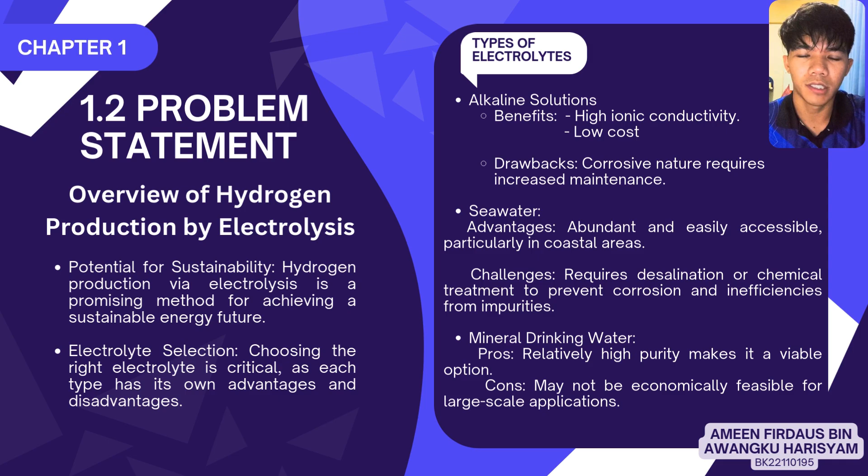The next subtopic is 1.3, the research objectives. So the primary objective of this research paper is to identify the most suitable and environmentally friendly electrolyte for hydrogen production via electrolysis. To achieve this goal, the study will focus on three specific objectives. The first one is evaluation of electrolytes. The first objective is to systematically study and test seawater, alkaline water, and mineral drinking water

as potential electrolytes. By measuring key parameters such as hydrogen yield, energy efficiency, and system stability under controlled experimental conditions, we will gather comparative data to assess the practical applicability of each electrolyte. This includes examining factors like ionic conductivity, reaction kinetics, and their compatibility with standard electrolysis systems. The second objective is environmental and economic impact assessment.

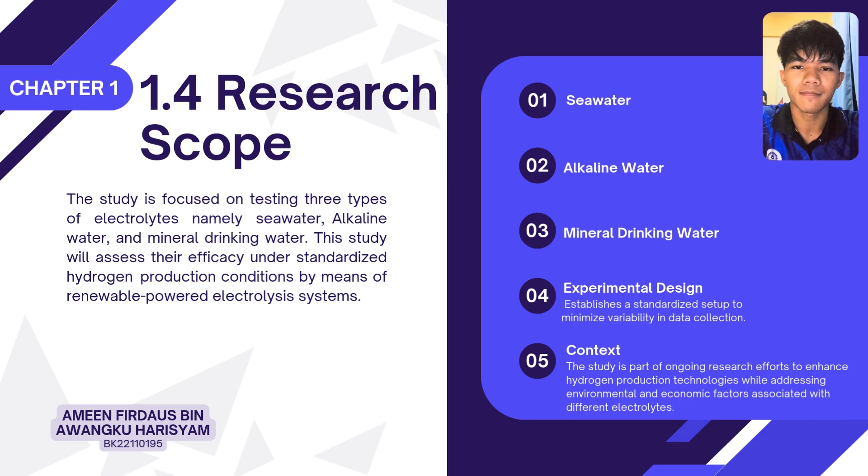Coming on to the last subtopic of chapter 1, research significance. The significance of this research lies in its potential to greatly influence the sustainable energy landscape by advancing the production of green hydrogen. By identifying the most effective and feasible electrolyte, this study could significantly reduce the operational costs associated with electrolysis systems. This is particularly crucial as the hydrogen economy expands, with various sectors and governments increasingly seeking to transition to more sustainable energy sources.

Moreover, the findings from this research may inform the design and development of next generation electrolyzers, enabling the structures to be tailored for optimal compatibility with specific electrolytes. If seawater emerged as a viable option, it could facilitate hydrogen production in areas with limited clean water resources, allowing these regions to invest in renewable energy solutions. Additionally, a clear understanding of the strengths and limitations of alkaline and mineral water electrolytes could enhance their targeted applications in both industrial and decentralized settings.

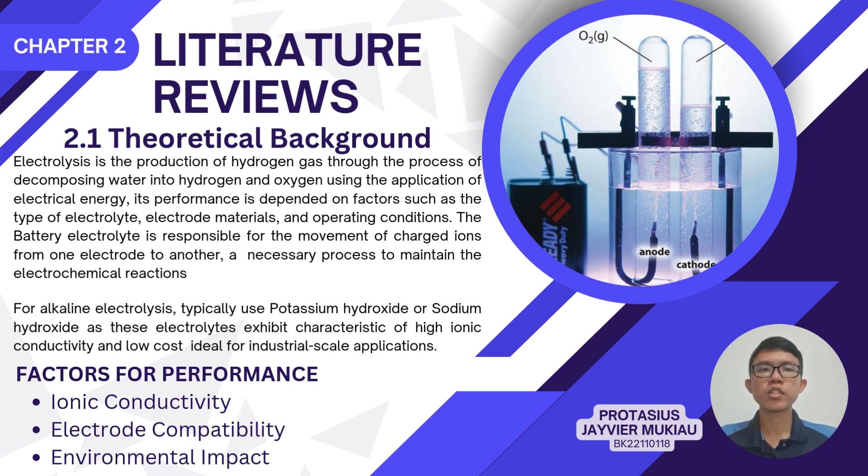Now for the factors that affect the performance of the electrolytes. Number one, ionic conductivity. Higher ionic conductivity minimizes energy loss, leading to improved efficiency of the system. Number two, electrode compatibility. Certain electrolytes are corrosive to electrodes, which requires more durable materials to be used. Three, environmental impact. Byproducts and resource consumption are different depending on the type of electrolyte.

Now I'll be presenting previous studies. These previous studies were mainly focusing on testing three types of electrolytes, namely seawater, alkaline, and mineral water. These studies assess their efficacy under standardized hydrogen production conditions by means of a renewable-powered electrolysis system.

Alkaline electrolytes, especially potassium hydroxide and sodium hydroxide, have been investigated more extensively owing to their higher ionic conductivity and low cost. These electrolytes are commonly used in industrial-scale electrolysis settings, with literature noting their reliability and performance under standard conditions. However, researchers also listed challenges like electrode corrosion, material degradation, and environmental impact affecting reliability. Although alkaline electrolysis is a well-established technology, considerable improvements in waste management are needed to improve its sustainability.

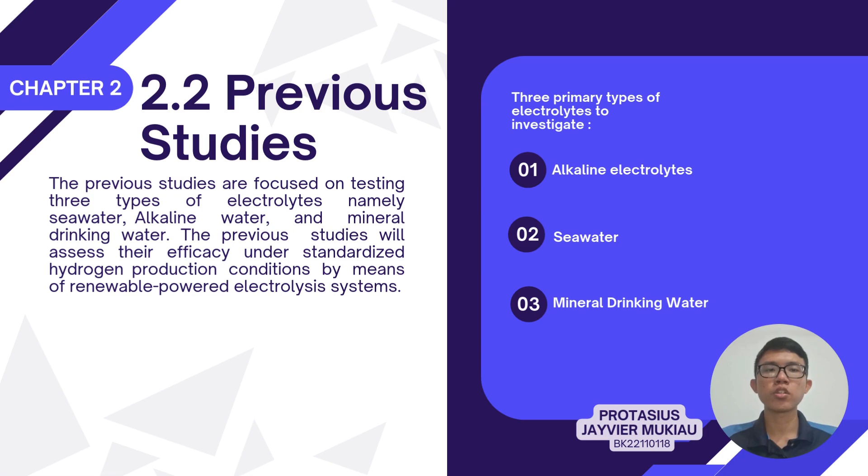Lastly, mineral drinking water, because of its higher purity, has been considered for hydrogen generation as an electrolyte. Its low level of impurities makes it less corrosive, requiring less maintenance and increasing the service life of electrodes. Nonetheless, the few studies that exist mostly address small-scale setups. The application of potable water remains prohibitive on an industrial scale due to both cost and availability, making it an attractive, effective, but potentially costly candidate for specialized applications requiring minimum operational complexity.

Now I will be presenting a comparative insight, comparing the pros and cons of the three types of electrolytes. Out of all the chemical electrolytes, alkaline water is the most effective and common for industrial purposes. Its excellent ionic conductivity leads to lower losses during electrolysis, making it a great candidate for large-scale hydrogen production processes. However, alkaline solutions can be corrosive and may require durable electrode materials and more routine upkeep, which would raise operational costs, along with environmental concerns over potential waste disposal.

In contrast, seawater provides a plentiful, economical source, especially in drier areas. While promising efficiencies have been attained with pre-treated seawater, they are still inferior to those of alkaline solutions. This can be due to residual impurities in seawater and the high energy cost of desalination. One drawback of seawater electrolysis is the generation of chlorine gas, which needs to be controlled by more sophisticated systems. Despite these challenges, seawater is an attractive solution for large-scale application in coastal areas, assuming pre-treatment can be optimized for cost and efficiency.

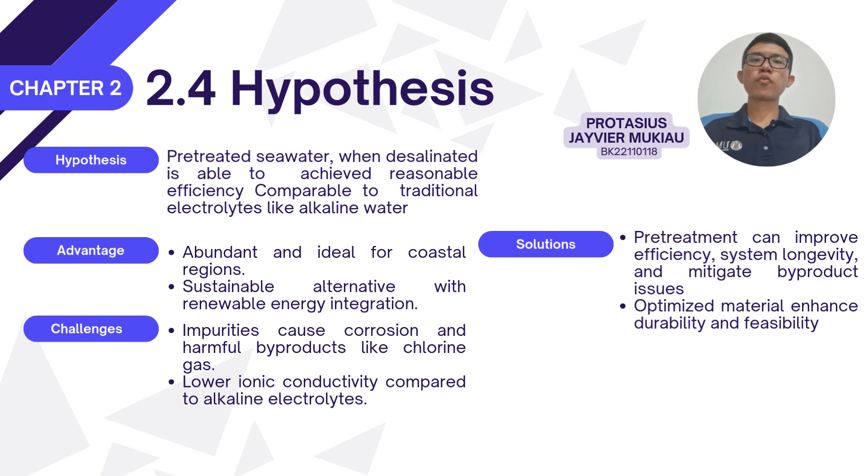The seawater pre-treatment and energy required for electrolysis hopefully can be balanced by coupling with renewable power such as solar or wind, making the whole process even more sustainable, especially in coastal regions. Renewable energy can be harvested from onshore and offshore facilities, making seawater an ideal source of water to fuel the production of green hydrogen via electrolysis.

Hello everyone, let's proceed with the methodology of our group project. Our group project evaluates hydrogen production efficiency in electrolysis using various electrolytes through experimental and mathematical modeling. Through this, we were able to analyze the impact of operating conditions, material properties, and environmental factors on the performance of the electrolytes.

Our experimental setup consists of, first, the electrolyte, and second, the electrodes, where two aluminum electrodes are used and connected to a DC power source of 4 AA batteries, providing an average of 5.88 volts. At the cathode, hydrogen gas is produced, while at the anode, oxygen gas is produced. For the efficiency calculation, these are the related formulas from previous studies that help us determine the volume of hydrogen gas produced for every electrolyte.

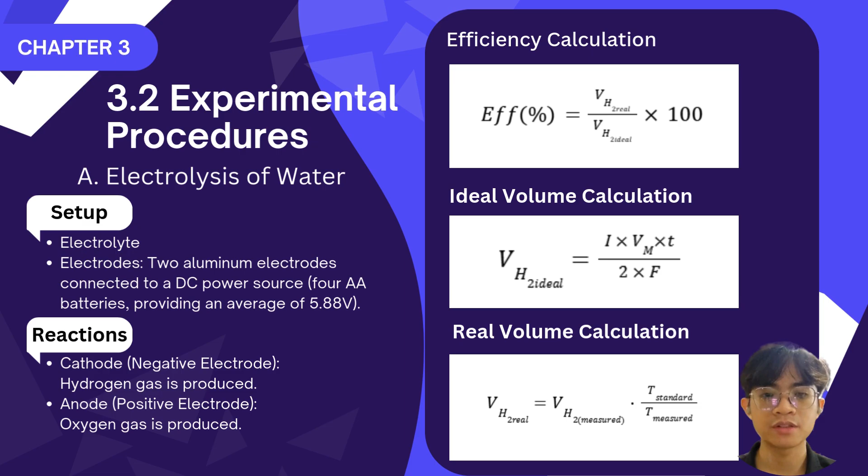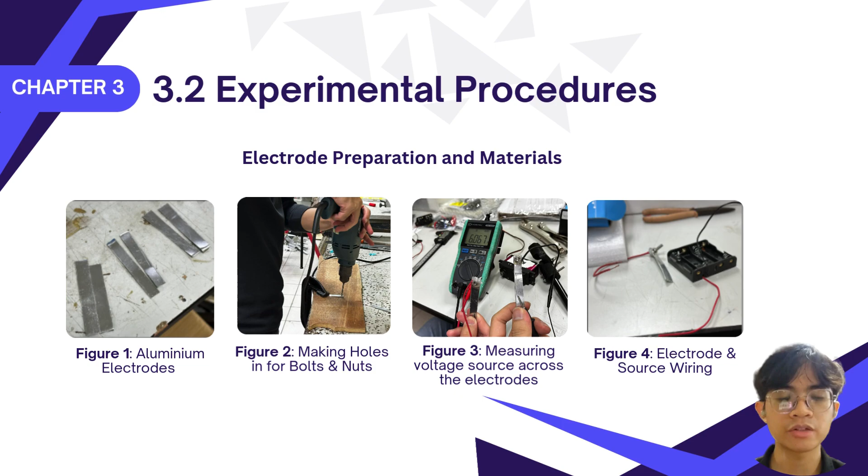Before we construct our experimental setup, several preparations need to be done beforehand. That includes cutting aluminum sheets, drilling holes to attach the bolts and nuts, attaching the wires, securing with soldering, and reinforcing with electrical tape. We also test for continuity. Electrode preparation and materials are shown in the figures. We prepare 3 pairs of aluminum electrodes, as shown in figure 1, and then we make holes for bolts and nuts. Then we measure the voltage across the electrodes to ensure the validity of the voltage supply from 4 AA batteries. For the electrode and source wiring, we use soldered connections reinforced with electrical tape.

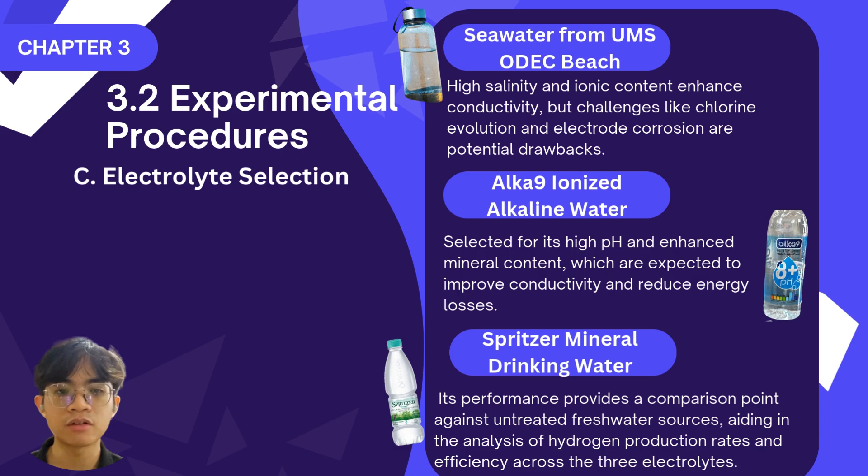There are 3 electrolytes we have chosen. First is seawater from UMS ODEC Beach, which is rich in salinity and ionic content that can enhance conductivity, but challenges like chlorine evolution and electrode corrosion are potential drawbacks. The second electrolyte is ionized alkaline mineral drinking water, selected due to its high pH and enhanced mineral content, which are expected to improve conductivity and reduce energy losses. The third electrolyte is Spritzer mineral drinking water, which provides a comparison point against untreated freshwater sources.

For our experiment, the manipulated variable is the type of electrolyte used, and the responding variables are the hydrogen production rate and the overall system efficiency. Control parameters include temperature, catalyst type, voltage supply, and the electrode material, which is aluminum. We standardize a 5% concentration of sodium hydroxide to enhance conductivity and stabilize the pH levels. Aluminum electrodes were chosen for their affordability and suitability for hydrogen evolution reactions.

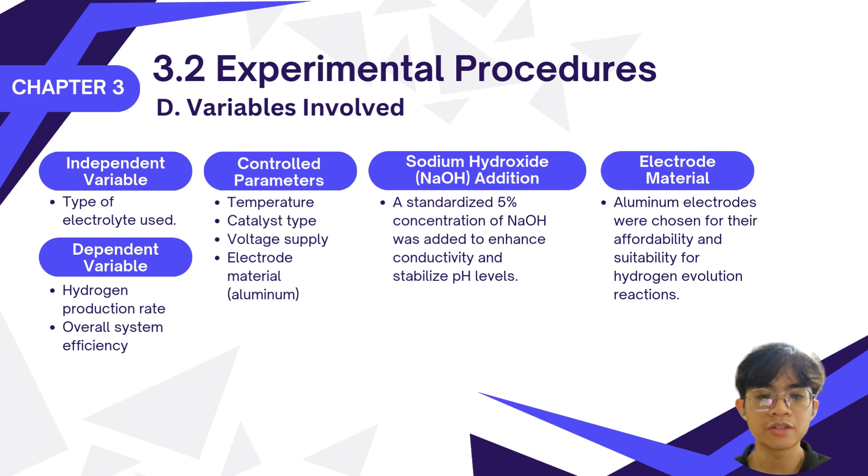Next, the parameters we monitored were cell voltage, electrode behavior and stability, electrolyte and electrode interactions, and hydrogen gas production rate. For data analysis procedures, we first calculate the hydrogen production rate, whereby the volume of hydrogen gas generated will be measured by the displacement of the electrolyte during experiment. Then we calculate the efficiency by comparing the theoretical hydrogen yield based on Faraday's laws of electrolysis to the experimentally observed volume of hydrogen produced.

Then we evaluate the energy efficiency, where we calculate the energy input using the formula E = V × I × T. And then we analyze the differences in energy efficiency across the electrolytes to assess how their composition and properties impact performance. And then for trend identification and visualization, we use graphical representation. For example, we plot the graph of volume of electrolyte displaced in milliliters against time in seconds to visualize hydrogen production.

Hello, this is the results section of our presentation. Shown in Table 4 is the tabulated results for our electrolysis experiment using the electrolysis prototype that we have built using aluminum electrodes. Table 1 to Table 3 are measured and calculated results based on the tabulated results that we have obtained from our experiment. We tested 3 different electrolytes: seawater, alkaline water, and mineral drinking water, and our focus was to understand their hydrogen production efficiency, practical applicability, and also the challenges of electrolysis within these 3 electrolytes.

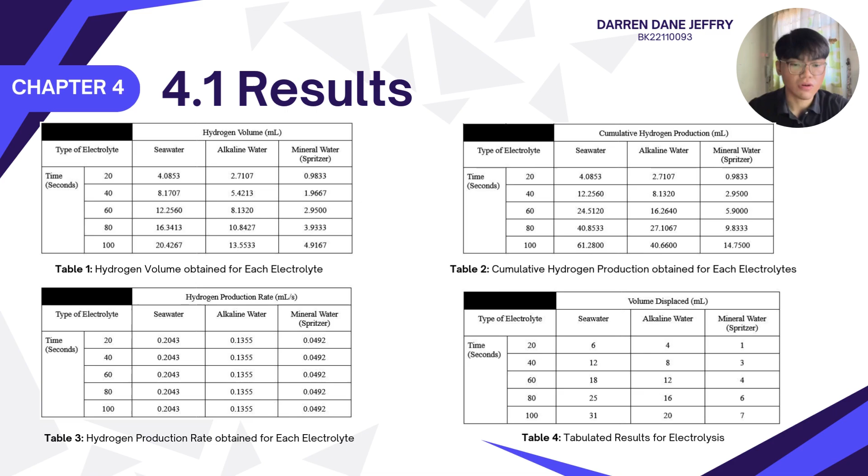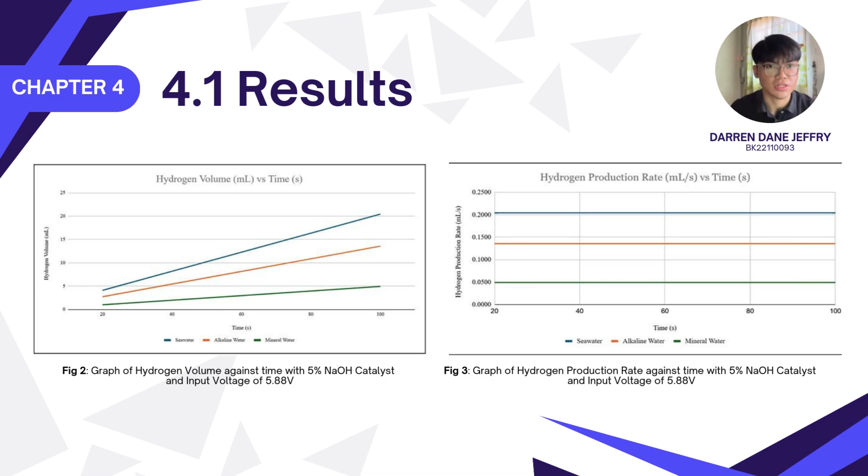Moving on is alkaline water. It has a cumulative output of 40.7 milliliters. It is a viable option for stable and safe hydrogen production, although it is slower than seawater. This makes it a practical choice for smaller scale or controlled applications where stability outweighs maximum efficiency.

The last one is mineral drinking water. It produces only 14.8 milliliters. It is unsuitable for practical applications without significant modifications; one of the modifications includes a higher voltage source, which is a higher current to the electrolysis setup. This result reinforces the need to focus on electrolytes with higher inherent conductivity for industrial scale hydrogen generation.

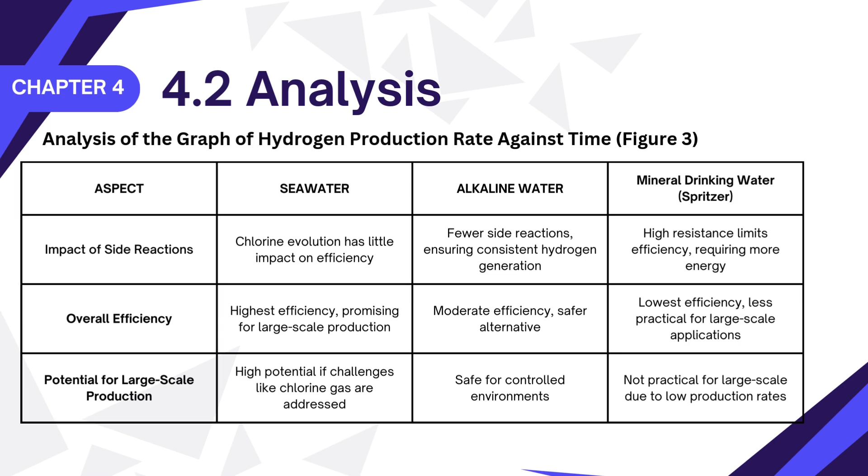So the outcome of our results almost supports our hypothesis. The expected outcome of this study was to identify the most efficient and sustainable electrolyte for hydrogen production. Seawater emerged as the most suitable candidate due to its abundance and natural ionic composition, which aligns with our hypothesis. Challenges like chlorine gas formation, however, must be addressed to optimize this application.

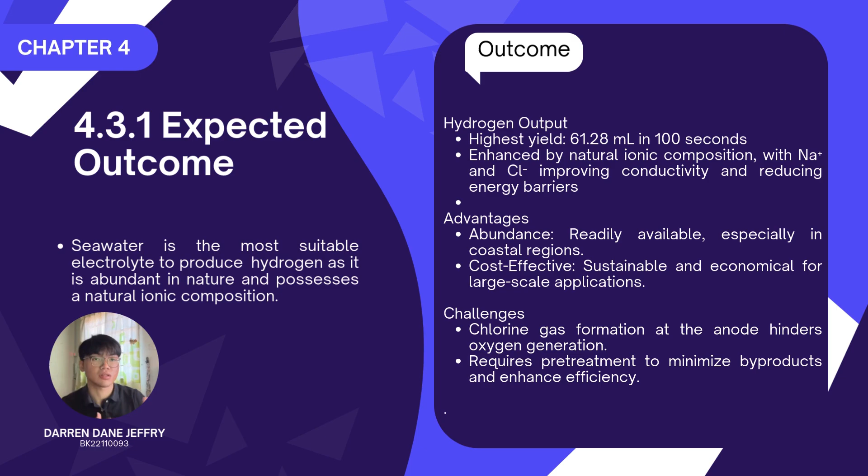Seawater's abundance and efficiency make it a promising source for large-scale hydrogen production, especially in coastal areas. However, the environmental and operational challenges emphasize the need for further innovation in pretreatment and system design. So it requires more research into the design of the pretreatment for seawater before it undergoes electrolysis for hydrogen production.

Now let's compare seawater with alkaline water, the performance between these two electrolytes. Seawater has yielded a higher hydrogen volume with up to 61.3 milliliters and a production rate of 0.204 milliliters per second. However, challenges include chlorine gas formation at the anode and also electrode corrosion, which is one of the factors that influences the environment.

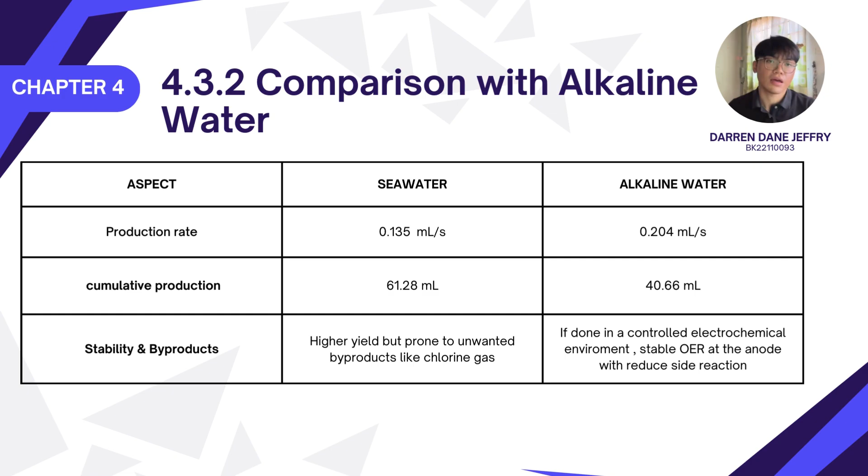Alkaline water has a moderate yield with up to 40.66 milliliters, or 40.7 milliliters, and a production rate of 0.135 milliliters per second. It provides a more stable and controlled environment with minimal side reactions. While seawater offers high efficiency, alkaline water's predictability and safety make it a more reliable choice for applications where stability is paramount. However, for maximum efficiency of hydrogen production, seawater is considered.

What if seawater is considered as a large-scale hydrogen production electrolyte? Scaling up seawater electrolysis for hydrogen production involves overcoming several challenges. One of the key methods includes implementing advanced pre-treatment processes to remove impurities like chloride ions and other minerals. Another is to develop corrosion-resistant electrodes, such as titanium or nickel-coated materials, or stainless steel is also viable.

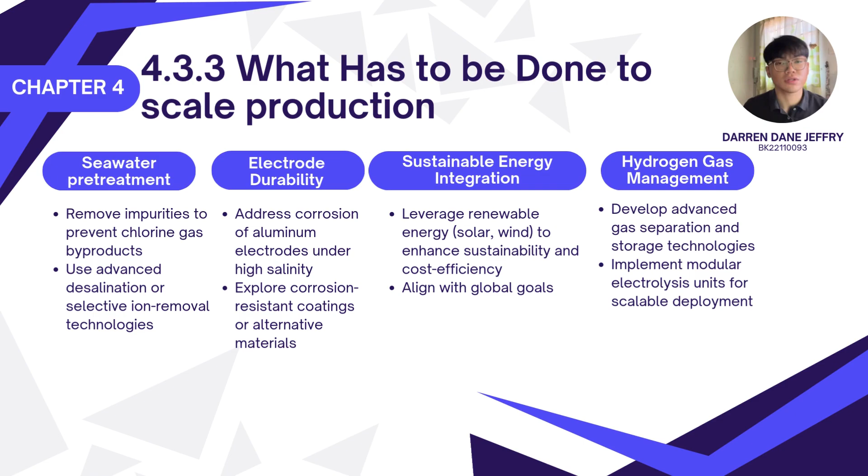We can also integrate renewable energy sources to reduce operational costs and environmental impact, as it also requires a high energy source, but not as high as mineral drinking water. Addressing these challenges requires a multifaceted approach combining material innovation, system design, and sustainable energy integration to ensure seawater's viability at industrial scale.

The role of oxygen in electrolysis. Did we address it? Hydrogen is the primary focus in our study, but oxygen still plays a critical role in the electrolysis process. Oxygen is generated as a byproduct at the anode by the oxygen evolution reaction, OER. It stabilizes the electrochemical system and ensures reaction efficiency.

Potential industrial uses for oxygen could enhance the economic feasibility of the process, because in our study only hydrogen is considered, as an application for electric vehicles or for future use in industrial applications. So in this study, the industrial use of oxygen is still not researched or elaborated. Although oxygen output was not the primary focus in this study, its role in maintaining system stability and its potential as an industrial byproduct cannot be overlooked. The ways we can enhance hydrogen production with seawater electrolysis is by enhancing.

It requires strategic improvements. So one of the strategies includes adopting advanced electrode materials for better corrosion resistance and efficiency, and also utilizing nanotechnology to improve reaction kinetics and reduce energy losses. Other than that, we can also implement intelligent monitoring systems for real-time optimization of operating conditions.

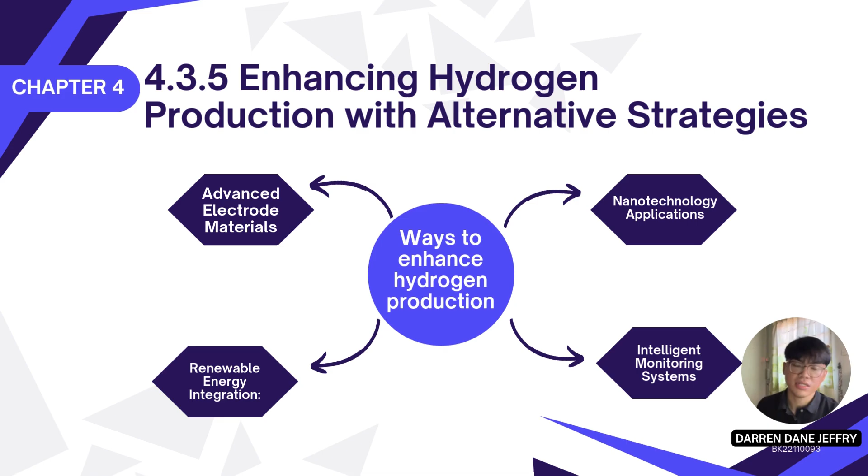These enhancements aim to maximize hydrogen output while minimizing environmental and operational drawbacks, paving the way for sustainable energy solutions. We can also use renewable energy integration like wind or solar. On electrolysis limitations with seawater.

So although the potential of seawater as a large-scale hydrogen production electrolyte is good due to its high yield of hydrogen gas, the challenges are still many. This includes chloride ions. This is a side reaction, and chlorine gas is produced as a byproduct of this electrolysis of seawater as electrolyte. This is harmful to the environment and also harmful to humans.

Other than that, high salinity accelerates electrode corrosion and reduces system lifespan. The high salinity of the seawater causes this corrosion and reduces the electrolysis system lifespan. Mitigation requires advanced materials and higher capital investment due to the higher quality of products such as aluminium, let's say nickel electrodes, or titanium or stainless steel electrodes.

These are costly, and also the pre-treatment facilities involved to pre-treat this seawater electrolyte before electrolysis are very costly. So addressing these limitations is critical to unlocking seawater's full potential as an electrolyte, necessitating ongoing research and development.

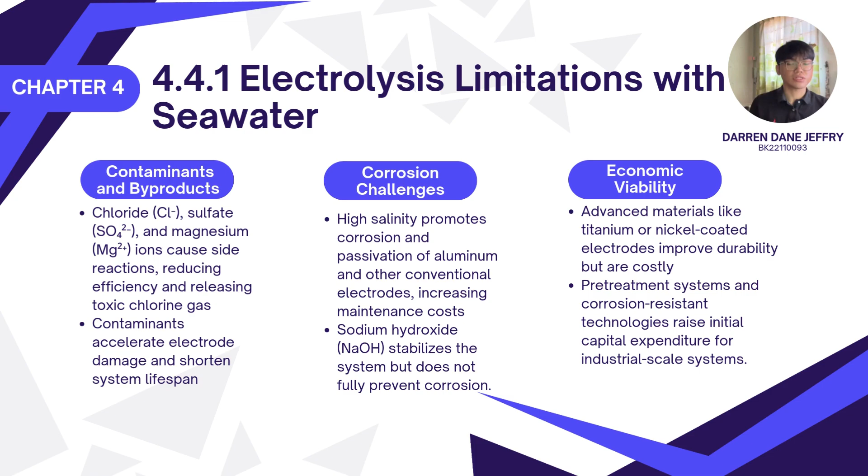The pre-treatment of seawater is mentioned repeatedly. So it is essential but energy intensive. Processes like desalination, ion exchange, and selective removal methods increase the operational cost of this electrolysis using seawater. Heat management is also crucial to prevent efficiency losses during large-scale operations.

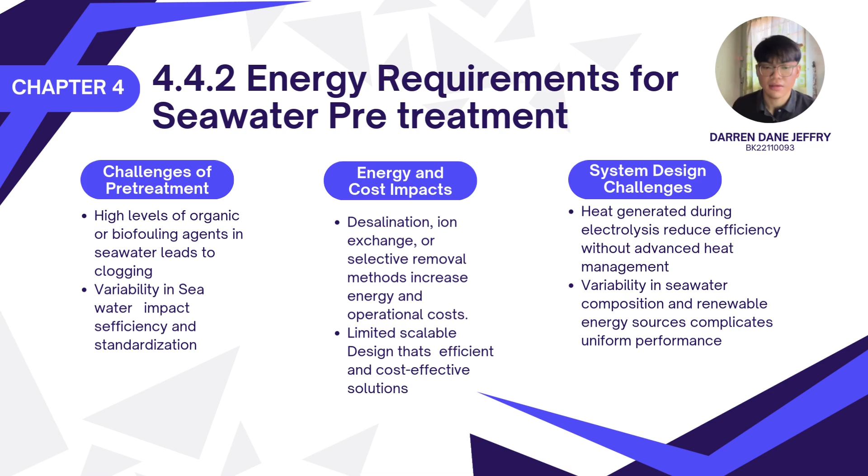Variability in seawater composition adds complexity to standardization. This is because seawater in different regions differs in mineral composition. So finding an energy efficient and cost-effective pre-treatment solution is key to making seawater electrolysis viable for industrial applications. Lastly, the environmental compliance regulations and challenges.

Large-scale hydrogen production using seawater raises environmental and regulatory concerns. The key challenges include byproducts like chlorine gas and brine, which can harm ecosystems if not properly managed during the pre-treatment of seawater. Infrastructure and logistical requirements for inland hydrogen distribution add complexity, like how they would distribute hydrogen gas across.

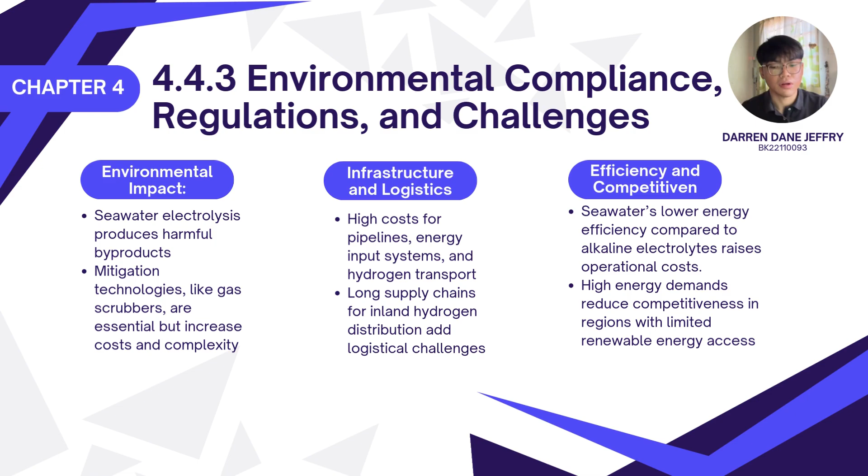And lower energy efficiency: seawater has a lower energy efficiency compared to alkaline electrolytes, which raises the operational costs. So meeting environmental standards while maintaining economic viability requires innovation in mitigation technologies and robust supply chain development.

So last but not least, for the last chapter, the conclusion. So in conclusion, our research highlights the remarkable potential of seawater as a resource for hydrogen production, especially as we strive towards a sustainable energy future. Throughout our study, we discovered that seawater emerged as the most effective electrolyte, generating the highest yields of hydrogen.

This success can be attributed to its high ionic concentration, particularly the presence of sodium Na+ and chloride Cl- ions, which significantly enhance conductivity during the electrolysis process. However, while the results are promising, we also encountered several challenges that must be addressed.

Notably, we observed issues such as electrode corrosion and the production of chlorine gas during electrolysis. These factors not only reduce the overall efficiency of the process but also raise important concerns regarding the environmental impact and long-term viability of using seawater in industrial applications.